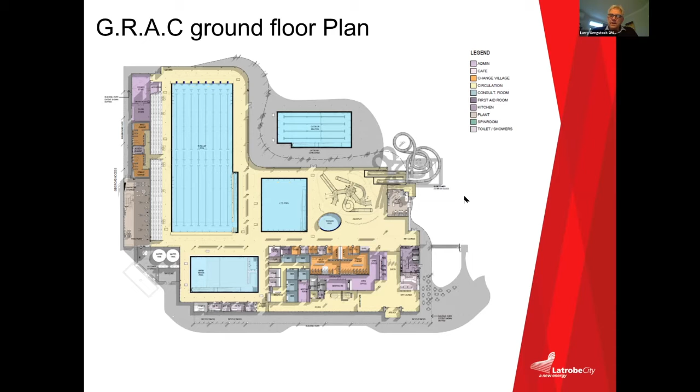Just a quick background on the facility: it's a $57 million outlay, with an indoor 50-metre pool, learn-to-swim pool, a warm water pool, and the normal sort of wellness centre and gym upstairs. What we have been able to do is actually put an outdoor pool in here as well, and all of this is a benefit of having the geothermal as part of the program.

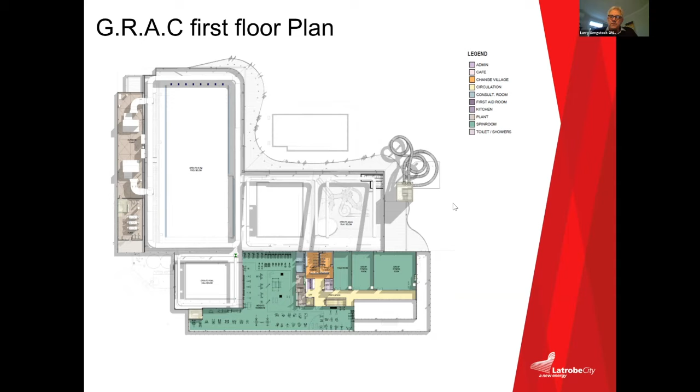Upstairs we've got water slides as well, and a full gym with program rooms. It's a huge piece of infrastructure for Latrobe City. As I say, I'll take you through the geothermal, but it's going to allow us to make it far more economical to operate as we go forward.

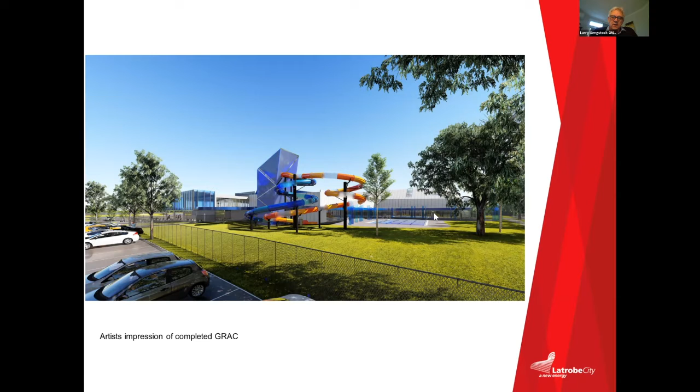So, geothermal - obviously with these sorts of indoor aquatic facilities, there's a huge demand for energy and heating. Typically we use gas boilers, and to be honest, we have got gas boilers as backup in this facility, but we've gone down the path of geothermal as a highly efficient energy and heating source, as well as it being sustainable.

We're lucky here in Latrobe City in that there's been a lot of exploration over the years in terms of coal mining, so there's real strong knowledge in terms of the aquifer and the heated water existing underneath where we are today. Actually, the coal is a bonus in terms of keeping the water hot - it's like a blanket. So the water we're going to be using for the geothermal is exceptionally hot.

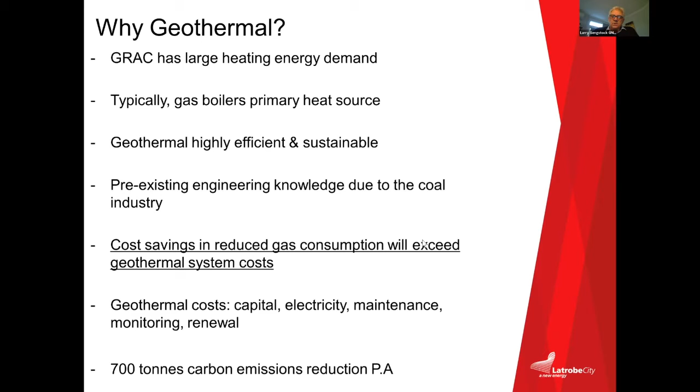We did a whole lot of business modelling on this from the start, and we believe that the geothermal is going to save us in the vicinity of $400,000 to $500,000 a year, just in heating costs. So in operational costs, it certainly reduces all of that. We've still got electrical and power costs, but we're looking at how we reduce that as well with solar power potential there. As you can see from the screen, it's going to save us about 700 tonnes of carbon emissions per year.

So what we are doing, and this is the interesting part, there's two bores. There's basically the taking the water out. We're not actually using the water. What we are doing is taking the heat off the water and then pushing the water back into the aquifer. They have to have a separation of some 500 meters. So the bore that comes up, the production bore, if the water comes up at about 63 degrees, we run it through a heat exchanger, which then heats all of the pools, all of the air, everything in the centre. And then 500 meters away, we push it back down into the aquifer.

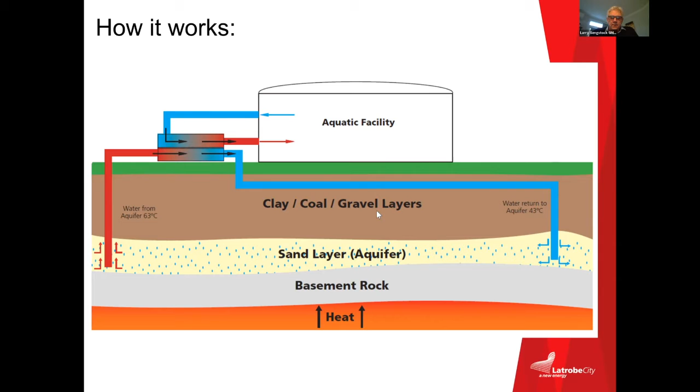So there is just a quick diagram of what it looks like. You can see the sand layer, the aquifer, underneath the gravel and the coal layers. It's about 620 meters down is where we need to go to get to the aquifer.

This one here is just a diagram of the aquifer and how it works. So where we are is reasonably shallow, so we're able to access the water, and again, we're not actually using the water. We don't see the water. In fact, it comes up through a pipe. We take the heat off it and we push it back down again. So there's no actual usage of the water, and no contamination as such of the water.

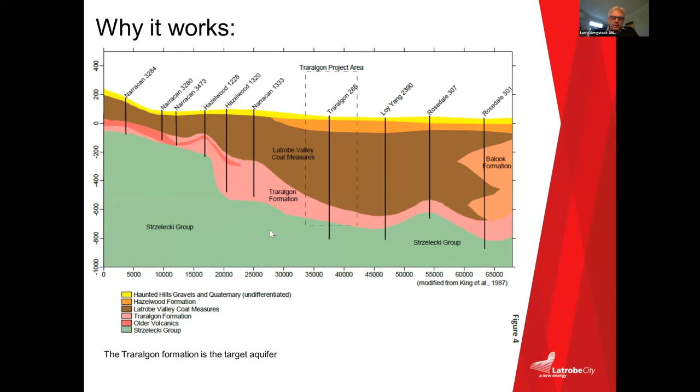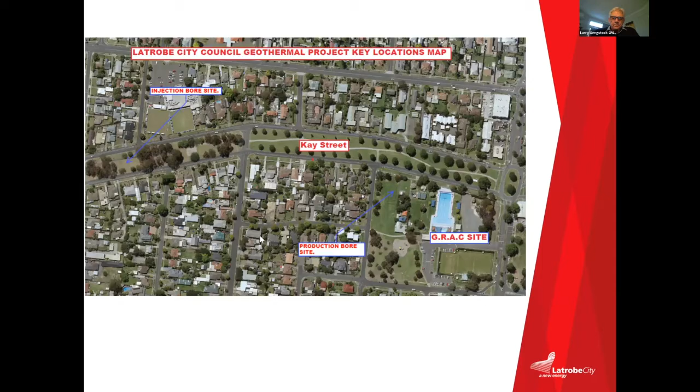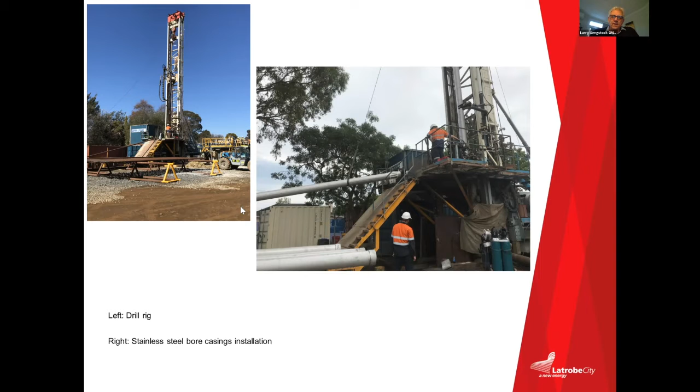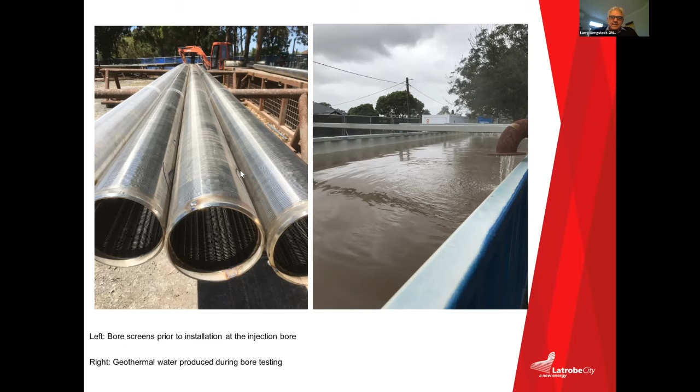These are the bore screens. As you see, it's a gravel and sand layer, so the water's not just a pond down there. We need to draw the water in through these filters, bring it up and then push it back down. But as I say, it comes up at 63 degrees, which is extremely warm. There are a number of pools doing this over in WA, and they run on about 45 degrees. With ours at between 63 and 68 degrees, we've got a hell of a resource that we can tap into here in Gippsland.

Again, just when we first started to bring the water up and the steam that comes off it, just to show you that it's an incredibly strong source of energy for what we need with our aquatic centre.

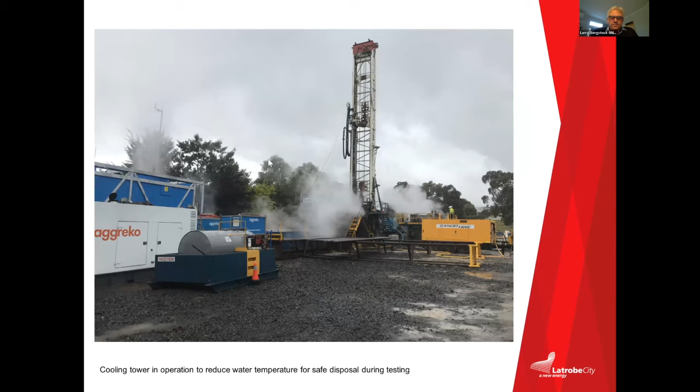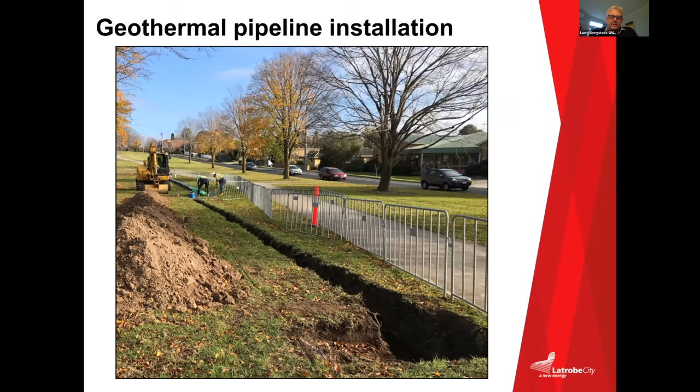It's just a quick summary of what we are doing, but we're currently completing the bore head. We're going through all the regulatory approvals. As we say, we're not actually using the water, we're not taking any water out of the system. We're actually just using the heat off the water and taking it back down. So we've had to go through a whole lot of regulatory approvals, but that's all in play as we speak. The whole thing will be commissioned at the end of this year, with GRAC, Gippsland Regional Aquatic Centre, opening in early 2021.

Once we get everything in place, this is a bit of a trial in terms of what other uses we could have with the geothermal here in Gippsland. There's been a lot of work over the years, but there's still more happening in terms of agriculture, aquaculture, industrial uses, and tourism, setting up hot water and warm water pools and other things.

This resource can be used as a sustainable resource, and as I said from the start, this is a massive facility, $57 million, with a 50-metre pool, a 25-metre pool, warm water pool, play spaces, learn to swim, all being heated by this geothermal. Our estimates at this point are that it's going to save us anywhere between $400,000 and $500,000 a year in running costs.

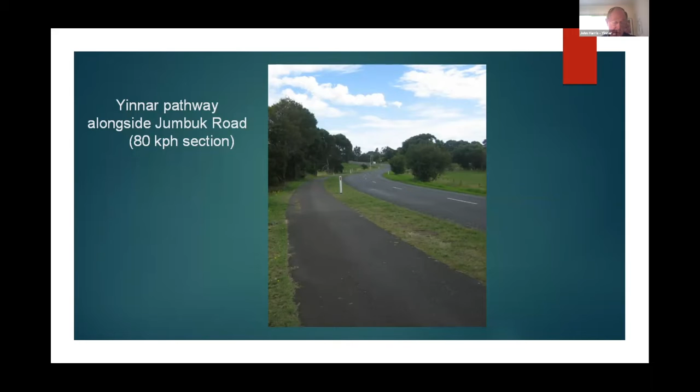Without lighting, parents of junior team members needed to drive children to and from training at the reserve to ensure their safety, meaning, unfortunately, many kids missed out on being able to participate.

In 2008, the Yinnar District Community Association formalised a list of community projects that we would work actively to achieve. The Pathway Lighting Project was, of course, priority number one.

Exploration of costs showed that lighting with reticulated power would require one-off funding of $160,000, while solar lighting could be progressively installed for $9,000 per light, which seemed to us more achievable. Other advantages, such as the ability for school students to investigate real-world solar energy by collecting data on the energy input and output of the panels and the luminaires, made solar lighting the association's choice.

Other factors, of course, have since reinforced that choice. Over the next 10 years, YDCA progressively explored a series of grant programs offered by state and federal governments.

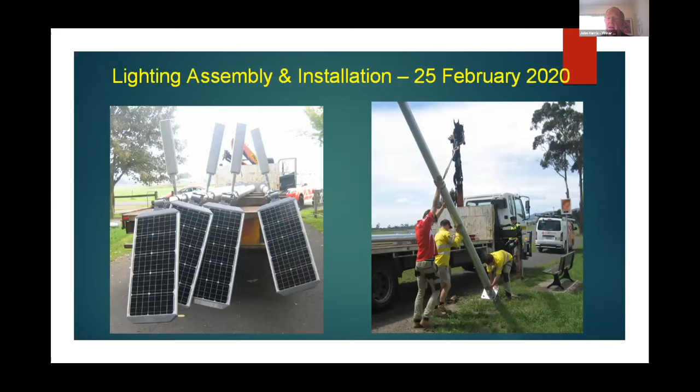Tendering and selection of the contractor took the remainder of 2019, and on February 25, 2020, the 24 solar lights were installed along the pathway and they were alight that night. This was 10 years, 5 months and 2 days from the date of YDCA's first expression of interest submission in 2009.

YDCA is particularly grateful to the Latrobe City Council and to the Latrobe Valley Community Power Hub for their support and assistance. We also thank our own community members and Yinnar District organisations which have stayed with us throughout the journey. I think you can see why the Community Association's motto for any major worthwhile community development project has become: never hold your breath, but never give up.

I think Joe might have some video of the pathway. Thanks.

The Yinnar Solar Path is a fantastic project. Latrobe City Council is extremely grateful to all of the community members who worked so tirelessly to get this to happen.

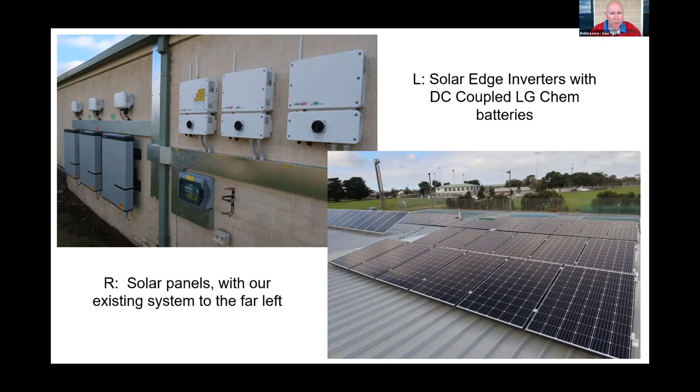Funding our ambitions. As John is very much experienced as well, funding your ambitions is a difficult exercise. The first steps for us was to identify the technical viability and the potential cost of the project.

This involved consultation with Wellington Shire as owner of the site, liaison with AusNet Services to ensure that they would permit a solar system this size in this location, determining if the proposed system would fit within our existing and proposed clubhouse layout, identifying suitable local suppliers and installers, and obtaining detailed fixed quotations.

The single greatest limitation on almost all community-based clubs is funding. For our project to come to reality, we needed to understand what funding sources were available. We needed to consider state, federal and local government grant options, non-government funders such as Foundation for Rural and Regional Renewal, Australian Sports Foundation and local funders.

After reviewing all of the available sources, the best possible fit was the then recently formed Latrobe Valley Authority, established by the Victorian Government to reduce the impact on regional economies of the closure of the Hazelwood Power Station. As a funding source, Latrobe Valley Authority were a very logical fit. We were looking to be more energy efficient and they were looking to create employment and job opportunities.

The fact that we intended to export power to the grid as one of our outcomes made the potential fit even more appealing. We were able to engage the Latrobe Valley Authority directly with our project with the assistance of Wellington Shire Council, who provided support and resources.

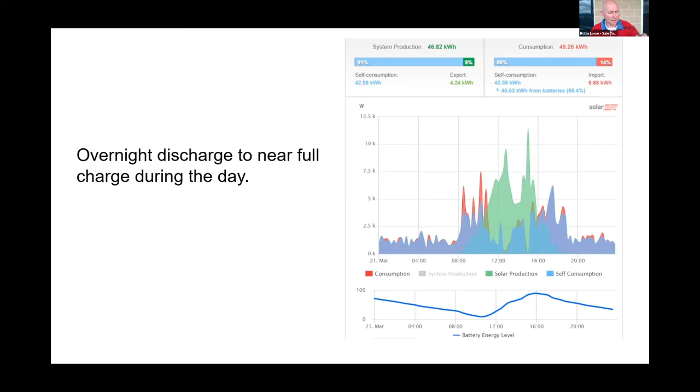On the next one is a day where we've actually used almost nothing from the grid at all for the whole day - we only drew very, very minor components during the course of the day. So we've been quite independent from the grid on a day like that.

As we came into late autumn, the club was actually sitting on a credit on its electricity account. We haven't had a power bill for all of summer, and we've got a small credit as we go towards winter. So the project has already been a success, and our savings have already hit or exceeded the benchmark set when we were looking to make the investment.

So the project, from our point of view, has been highly successful. The club has achieved the savings it was looking for, and achieved significant environmental savings in terms of both electricity and greenhouse gases, and we still remain overtly ambitious.

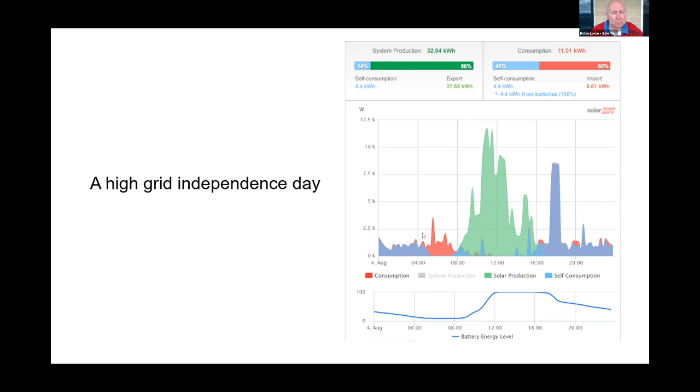Oh sorry, Robin, I was a bit slow getting back on there. Look, I actually had a question - I was just wondering what the level of engagement or interest in the club's progression on sustainability has been like within your membership base. Is it something that's actually driven these changes, or is that mostly from you?

It's actually a combination. Our committee is very responsive to this, and I think they've picked up on the members reflecting, I suppose, the community expectations around these things. That drives through our committee to ensure we pick up on all the things available in this space. So we're very conscious of our footprint, conscious of the privilege of the location we have, and our members do remain very interested in that.

So it is something that we produce into our newsletters, and people are able to see and comment on.

Fantastic, we have a question from Peter. Your presentation mentioned two different battery types - which one was actually installed? So we actually installed LG Chem batteries, they're more suitable to the purpose. The alternative batteries are Tesla batteries, but these ones are actually more suitable to the purpose. So these are an LG battery, which is similar, but the technical people tell me that they're actually more suitable for the job that we've got them doing.